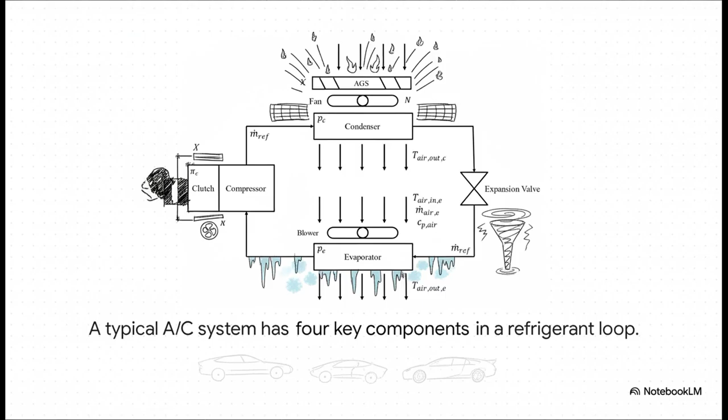Now, for a long time, when engineers tried to save AC energy, they looked at two main culprits. First, the compressor, it's like the heart of the whole system. And second, that big condenser fan that helps cool down the hot refrigerant. And look, it makes total sense, right? Those two things use the most juice.

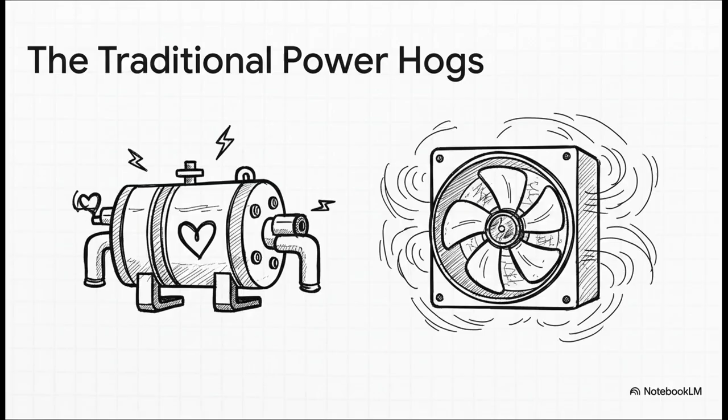But what if that focus was too narrow? What if, by only looking at the obvious power hogs, they were missing a massive opportunity right under their noses? What if there were other, sneakier parts of the system you could tweak to get an even bigger win? And that, my friends, is exactly where this new research comes into play.

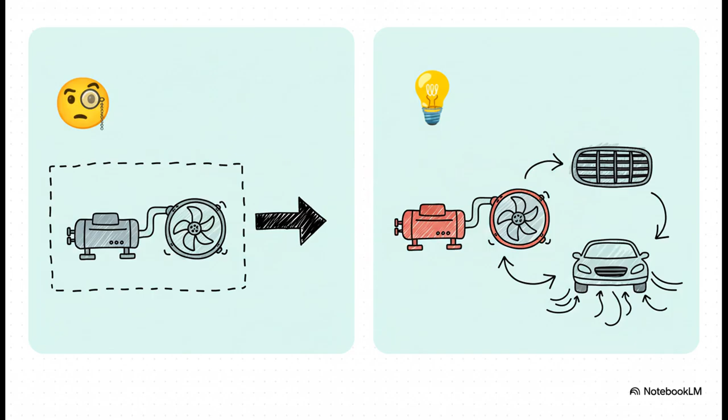This really lays it all out. The old way of thinking: just the compressor and the fan. But this new, more holistic approach adds two totally new things to the mix: active grille shutters, yep, the grille we were talking about, and the aerodynamic drag of the car itself.

So what in the world are active grille shutters, or AGS? Simple. They're basically smart blinds for the front of your car. On the highway, they can close up, making the car slice through the air better, which saves fuel. But when the engine or the AC gets hot, they can open up to let more cooling air in. Now, these things aren't brand new, but here's the kicker: nobody ever thought to make them part of the AC's control system. They were always separate, until now.

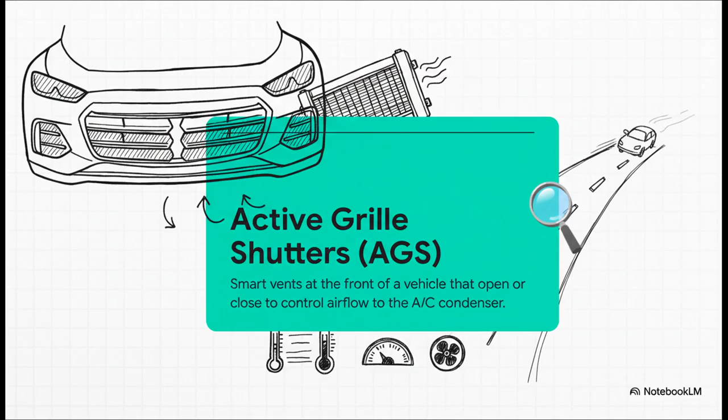Okay, so you've got this cool new idea. How do you actually test it?

You can't just rip apart a car's AC system and hope for the best. No, you do something way smarter. These researchers built what's called a digital twin, basically a super detailed computer simulation of the entire car that behaves just like the real thing.

They actually used two main models. You've got the VEM, which is the gold standard, think of it as the hyper-realistic, super complex digital twin. It's the benchmark. Then you have their new baby, the NL model. It's simpler, faster, but crucially, it's the first one to include the physics of the grille shutters and drag.

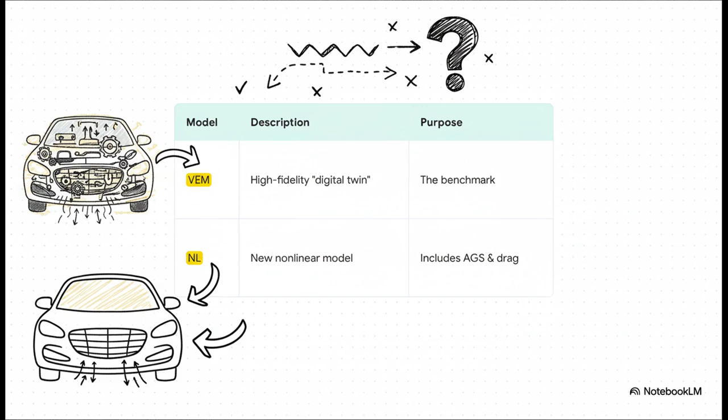So the big question was, can our new, simpler model hang with the big, complex one? Can it predict what the real car will do? And here's the answer, a big yes.

Look at these graphs. The red line, that's the super accurate VEM model, our virtual real car. The blue line is their new model. Just look at that, they're practically on top of each other through all these different driving scenarios. That's the proof right there. Their new model is solid, it's accurate, and we can trust what it's telling us.

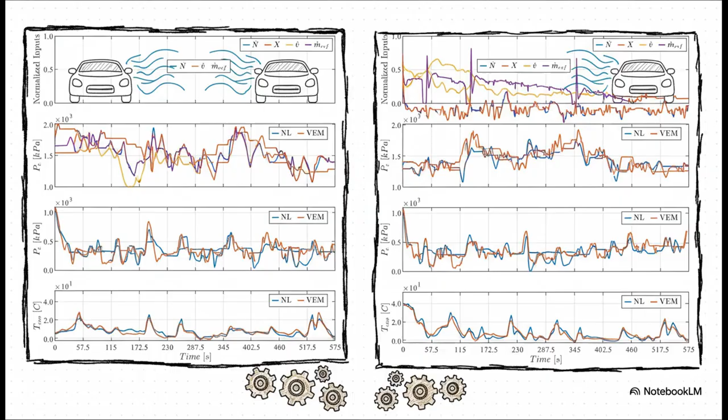Okay, so we've established the model is legit, but what did it actually find? This is the really cool part. Take a look at this graph of power use. You can see the total power for the AC jumping all over the place as the car drives.

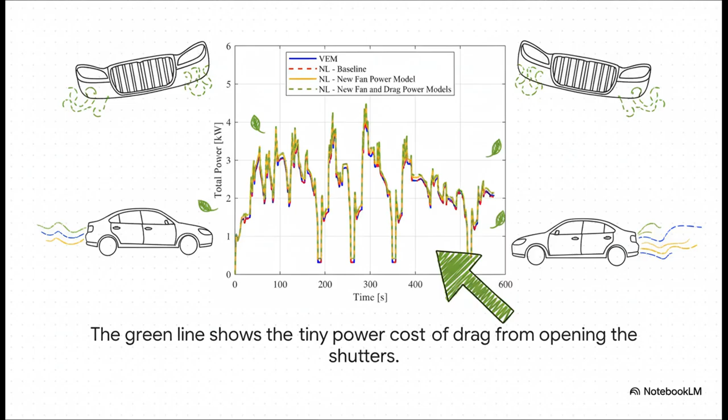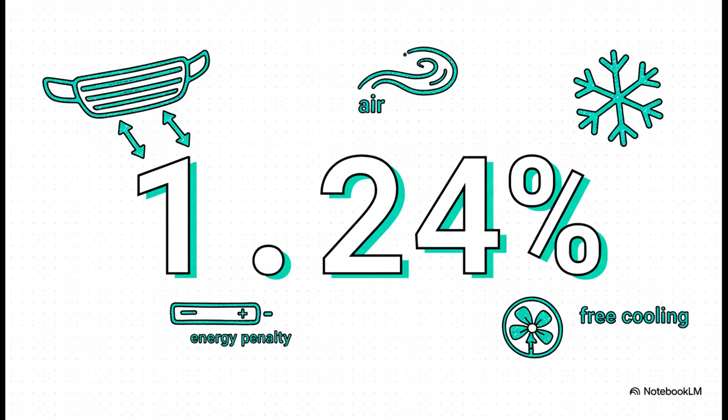That's practically nothing. It is an incredibly small price to pay for a massive amount of what is essentially free cooling from the air rushing in.

And the researchers themselves put it perfectly. They said that since the energy cost is so small, you can use the grille as a new tool in your toolkit. You can open it up, get a huge blast of cooling for almost no energy penalty, and then you can tell the real energy hogs, the compressor and the fan, to just chill out for a bit. It is an amazing trade-off.

So what this really does is unlock a whole new, much smarter way to think about managing a car's energy. It's like a whole new strategy. Step one, need to cool things down? The first thing you do is open the grille shutters.

It's your cheapest move. Step two, now that you have all this natural airflow, you can ease off that power-guzzling condenser fan. Step three, and with the airflow and the fan working together, the compressor doesn't have to work nearly as hard. And the result of all that, a way, way more efficient AC system from top to bottom.

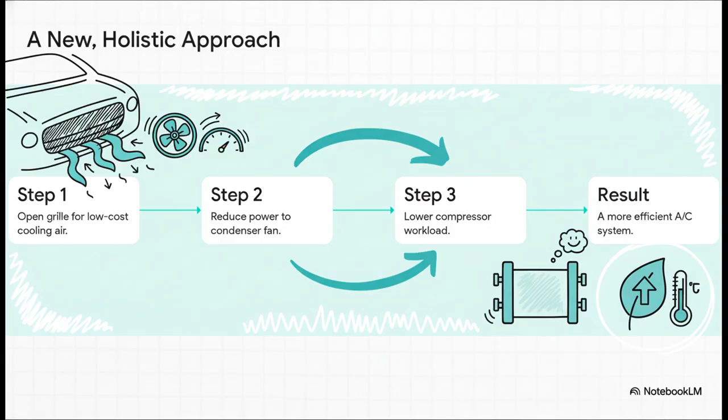But honestly, the big idea here is so much bigger than just your car's AC. What this research really shows is a shift in thinking. It's about looking at the entire vehicle as one big, smart, interconnected system, where every single part, even something you thought was simple, like a grille, can work together to save energy.

And that just makes you wonder, right? If there's this much untapped potential in a car's grille, what's next? What other supposedly dumb part of a car is just sitting there, waiting for a little bit of smarts to unlock huge gains in efficiency? I don't know about you, but I think that's pretty exciting to think about.